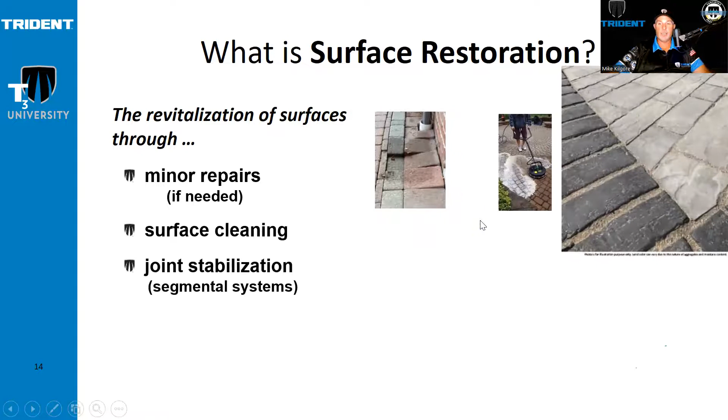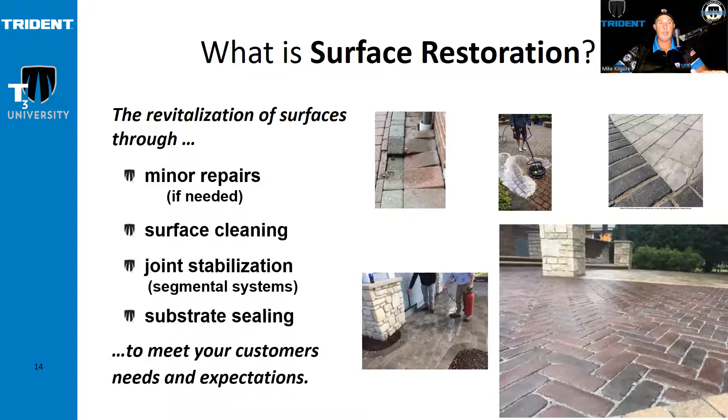The revitalization of surfaces through minor repairs, surface cleaning, joint stabilization, segmental systems, and substrate sealing - to meet your customers' needs and expectations. That's important, to make sure you meet your customers' needs and expectations. So don't leave money on the table here.

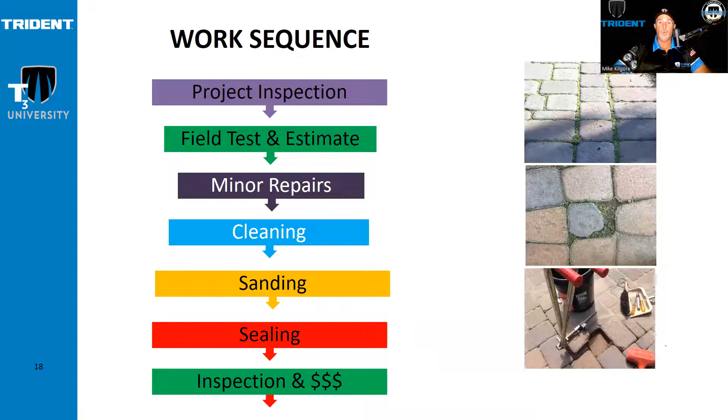So what we're going to focus on is the cleaning, sanding, and sealing. That's what we're focusing on today.

The project inspection, field test and estimate, minor repairs, inspection and money, sales, how to generate leads—that's what we cover inside of our advanced training. That's how we're getting you to become more of a better business and closing more deals.

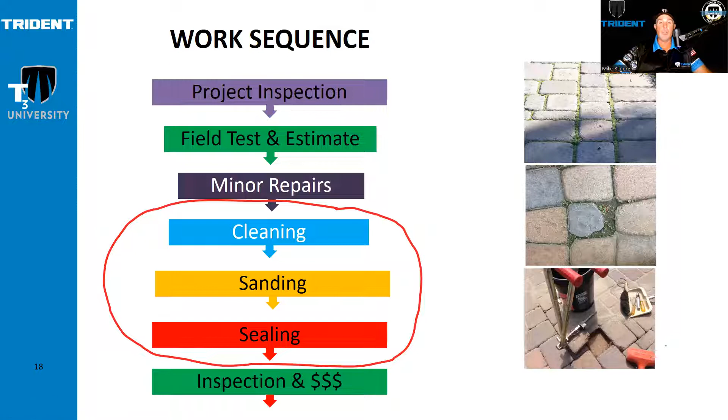So what do I need to know before I give a bid? You need to know the scope of work, the customer's expectations and values, surface porosity, coats and coverage rate, desired outcome—that's going to be really important. We're going to talk about the sealer triangle, sealer selection guide. Take photos before, during, and after.

Not just to CYA, not just because of that. We want you to take those photos because that's what you're going to also use for your marketing. Application technique, product availability, and of course, scheduling.

Hey, so Mike, cleaning, quick question. Yep, go ahead. They have a question if people are charging more for around pool areas and around lanais, or is anybody in Florida getting more money for that because of what it is?

I would say that on average, most people are charging one rate, but I do know that there are a few customers that say that if it's a driveway and it's wide open and there's no cages or anything else like that, they're charging one price. And I do know of two companies now that I think of at the top of my head that are charging a little bit more for pool decks.

Because you have to hand paint the coating or there's techniques for doing that. Also making sure that you're not getting sealer onto the screens. There's a whole lot more moving parts when you're dealing with a pool deck that's there than it is when you're just doing an open driveway.

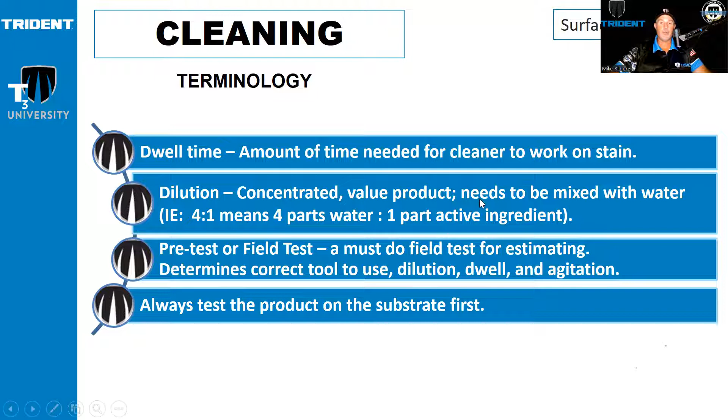Setting the customer's expectations and what they think. This is the listening time.

Typically, when I walk into a customer's home, which I don't do very often, my strategy was very simple. I'd walk in, say hello, glad we're here, show me where the pavers are. We'd walk in the back and say, wow, you've got a lot of pavers. Why am I here? What can we help with? And just leave it wide open to them.

Majority of the time, they're going to say, well, look how faded the pavers are, I've got weeds everywhere, I've got this, I've got that, these pavers are moving. They are just waiting to vent. Let them vent first, then you start to build your sales tactic around that.

Educate your customer. Give realistic expectations. Be careful not to oversell—it's very easy to do. Like saying, 'Man, I can make these pavers look brand new, like you just bought them off the showroom floor today.'

I'm going to give you a piece of advice, a saying you can use. A lot of guys I know use this in their marketing material. This is very important: we will make your pavers the best your pavers can be. Now that sounds really cliche, sounds very simple, but if I slow it down and put a different emphasis on a different syllable, it sounds a little different.

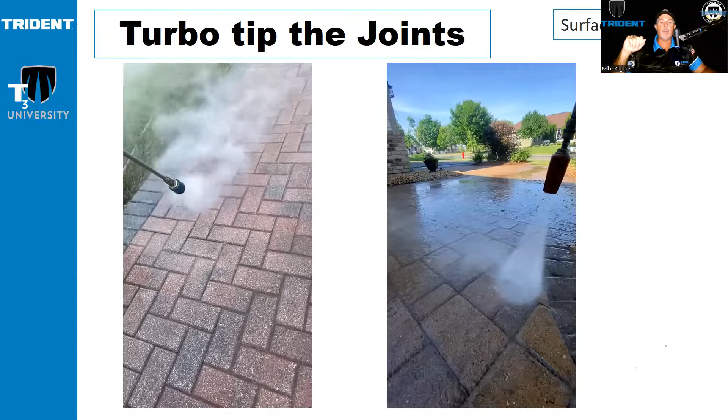This is by far my favorite turbo nozzle that you can get. The advantage is that it's got a tungsten carbide tip inside of it instead of a ceramic tip. Ceramic tips are notorious for breaking, especially if you don't start them directly straight down. With a tungsten carbide tip, since it's more of an excavation tip, it's not going to break. You can start it up, down, left, right—it's not going to make any difference.

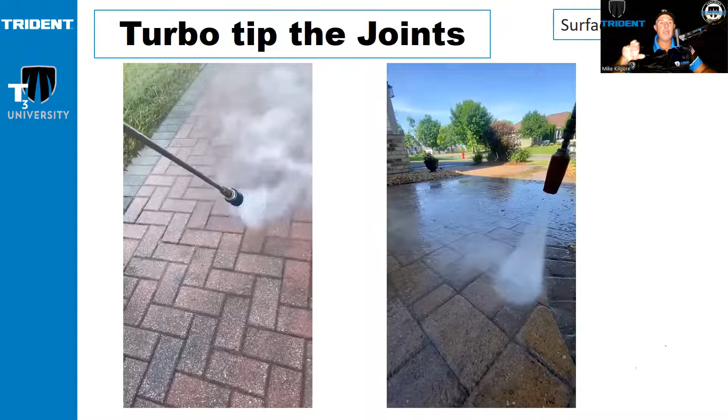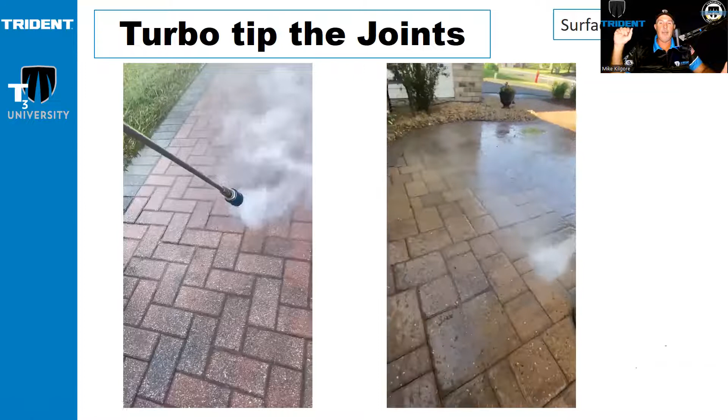Plus, they slow down the rotation a little bit, so it has a chance to dig deep in between those pavers. You can see over here, this is another one, I think a Suttner, digging down. But the first thing we want to do is dig out those joints. I prefer to dig out those joints first, simply because I want to get rid of any organics or weeds that may be inside of those joints.

If I use a surface cleaner over the top of it, there's a possibility I'll knock off all the leaves, and I'll have no idea where to really focus my effort to dig out those weeds. If you have pavers with a bunch of weeds that look like a big chef salad over the top, I suggest you get some Roundup and weed killer and flood that whole area two weeks prior to coming in to clean. Do it two weeks out, and again one week out. The objective is to show up and have everything completely dead—all the weeds completely dead. Then you can do the turbo tipping all you want. If you've got really tight joints and can't put a lot of sand inside them, it's going to be very difficult to block those weeds. So we've got to kill them, dig them out, and then put sand into the joints.

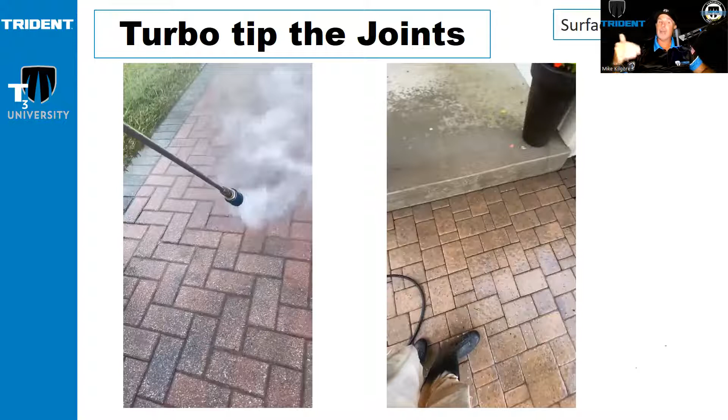Okay, these next two stages—the next stage is the longest one. It's got the most detail, and that's about sand, right?

Hey Mike, they asked if you turbo tip every time. I turbo tip every single time. The objective is to make sure you dig out the joints at least three-quarters of an inch deep. That's what you've got to do, at least three-quarters of an inch. So yes, I turbo tip every single time. Now, we do have some guys out there running 31 gallons a minute—Mike Arnone is one, and he's able to surface clean and turbo tip at the same time. But that's not all of us. That's why I always turbo tip, and I turbo tip first, to make sure I dig out those joints and get them as deep as possible, because I want to replace it with the correct joint sand.

All right, joint sanding—it's just sand, or is it? Let's talk about sand. What is the importance of joint sand? Loads are transferred from one unit to another through joint sand.

If you do not have joint sand in those pavers and you drive over the top of it, all that pressure from the truck sits on just the pavers the tires are sitting on. If you have joint sand in it, the tire can lay over to the right, to the left, forward and back, creating a big dome about this size, and that's where the load is being transferred to. So when we talk about load dispersion, that means the weight is now being dispersed across all the different pavers instead of just a few of them.

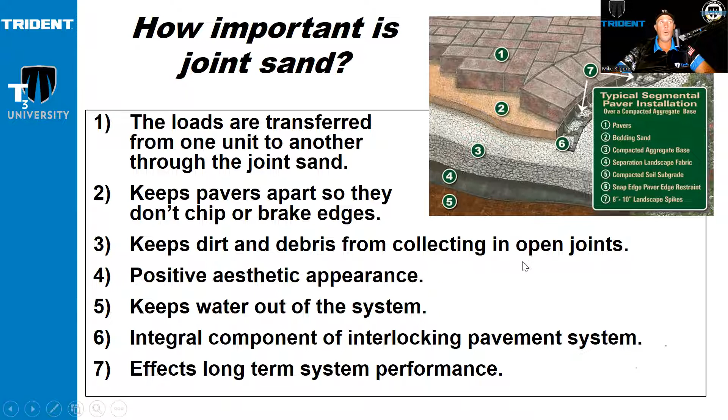This is what's called the soldier row on the outside to help protect the pavers on the inside. That's why they call it a soldier row. Well, that was a hard one to get out there. So, success begins with your choices.

Sand should be hard and angular shape, should be washed and have as few fines as possible, have no large aggregate, and contain no organic material. That's why you start seeing these guys talking so proficiently about play sand. Play sand is not kiln dried. It's got a lot of organic material inside of it. Majority of them, if you open them up in the bag, they've already got mold and mildew inside the bag.

The colors of the aggregate complement the surface. Made in America - don't know why that's extremely important, but all of our sand is made in America. Actually, it's made in Chicago, Illinois, outside in St. Charles of the Chicago, Illinois area. But this is important: it must meet the ASTM C144 standard for joint sand.

What is ASTM C144, you asked? Yes, I know, that's why you're asking us. The way in which it's created is that it has to meet certain sieve analysis. I'm going to show you this sieve analysis right here. I'm not going to go into great detail with it, but what you're finding is that it's got an aggregate that is not rounded.

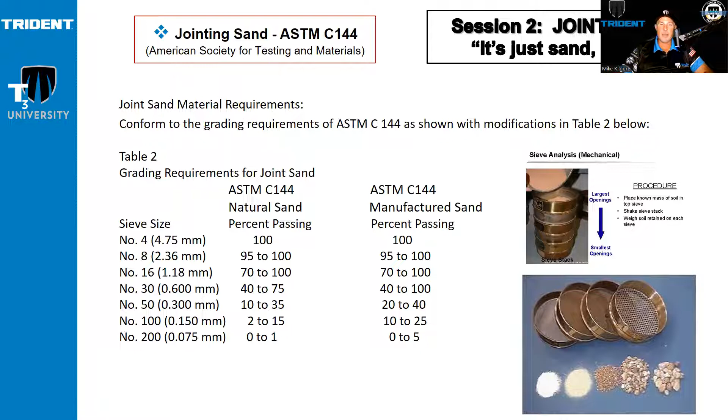We talk about joint stabilization out there - there's no one that's more versed around joint stabilization than Trident and SEK. This is our specialty, joint stabilization. This is what we excel at.

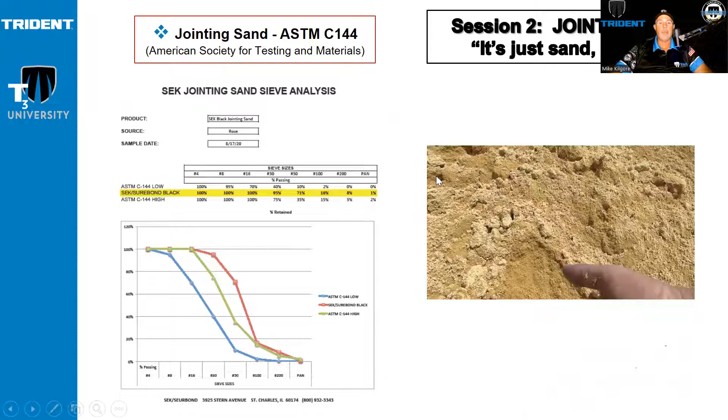So as you can see, the jointing sand sieve analysis - there's what's called an ASTM C144 low, SEK Surebond Trident black, ASTM C144 grade high, and we fall right in between the middle of the low and the high. So there's two different grades of ASTM, and we're right in the middle. That's why we have such fantastic sand that everyone keeps talking about.

So where is the sand supposed to be, right? Let me go into here and do a little annotation. So here's my annotation right here. Majority of people that are starting off in sanding and sealing, they're going to take that sand and go straight across here - they're going to run right across the top of those pavers.

The problem with that, filling in the joints from here, is that these pavers right here tend to go up and down with weight transfer that happens on it. Well, when they do, it ends up cracking those areas that are here. So then you get all these broken joints, and it takes out all the sand inside here, and it just looks horrible. So let me go back to this - where is the sand supposed to be?

The sand's supposed to be 1/8 of an inch below this area right here, which is called the chamfer line. See this line right here? I'll give you a little arrow. That is your chamfer line.

That's right there, and you'll see it on the pavers. Now, on tumbled pavers, typically you don't have a beveled edge. This is where the bevel would be, as you can see on this side. This is a tumbled paver that goes all the way over, and we want it to be 1/8 of an inch below the surface.

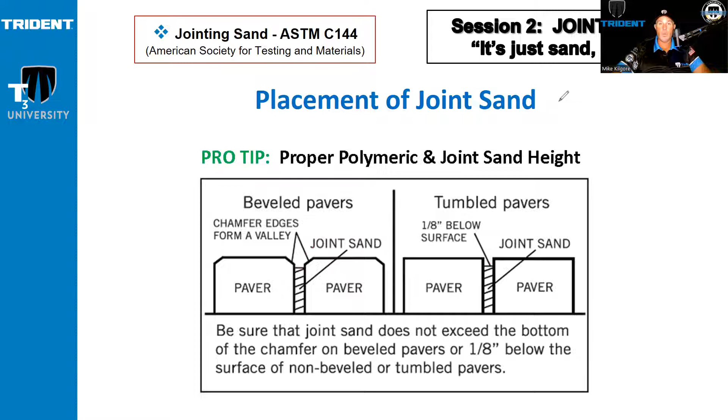So let me clear this out. Everybody good there? All right. Come on, there we go.

So we have 2 types of sand - actually 3 types of sand now. We're not going to really talk about the resin sand because that's getting ready to start to come out next month. You're going to start seeing more of those on the board where we talk about the resin sand. I'll tell you a little bit more about it just so that you know.

But joint sand and stabilizing sealer is the best choice when you clean, sand, and seal, right? And the polymeric sand is a good choice when you clean and sand, right? Because the sealer itself is going to harden the sand inside of the joints.

It meets ASTM C144 for joint sand - angular, wash, dried. Color of aggregate: we have tan, gray, fieldstone, platinum, black, and pearl, which I'll show you the pictures of here in a second, made in 50-pound bags. And also we have stabilizing sealers covered in the JSS sealer section, which we're going to talk about - that's the joint stabilizing sealer.

Polymeric sand is a good choice. The interesting thing about polymeric sand is a lot of guys in Florida say you should never use polymeric sand in Florida. You're right - you should never use polymeric sand incorrectly in Florida. I'll say it again: you should not use it incorrectly in Florida.

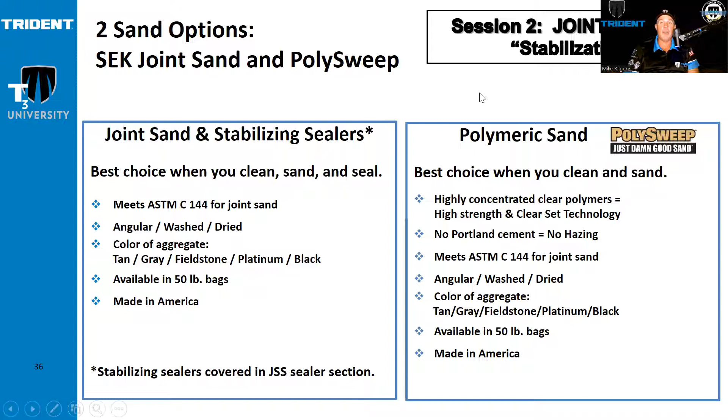So these are the 6 colors: tan, gray, fieldstone, platinum, black, and pearl. You can also contact us and we can send you a sand sampler with all 6 of these sands inside of it, free of charge. Actually, you end up getting one when you register for an account on Trident Protects. That's part of the onboarding process, is that we send you a sand sampler and some flyers.

Hey Mike, real quick. Yep.

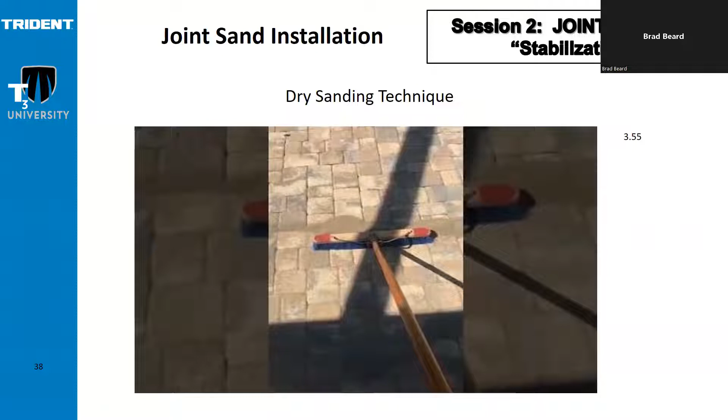We're looking to see if we have any bags of tricks for, do you have a trick to get the sand 1/8 of an inch below the chamfer? Yeah, you take a straw, put the sand in your mouth and you blow it in there, and it's great. Or you take your hand or something. A lot of that's going to come down with just experience, right?

I use wet sanding technique. We're going to talk about the 2 different techniques that are here: the dry sanding technique, a lot of that has to do with your broom, and of course the wet sanding technique, being able to push that sand inside of the joints.

You're going to find people that are going to come on here and say, I've tried wet sanding and it's horrible. I'm going to give you a piece of advice for wet sanding: don't start off just doing a pool deck with a bunch of different angles. Try it on a driveway first. Also, make sure that you're keeping the water out in front of you.

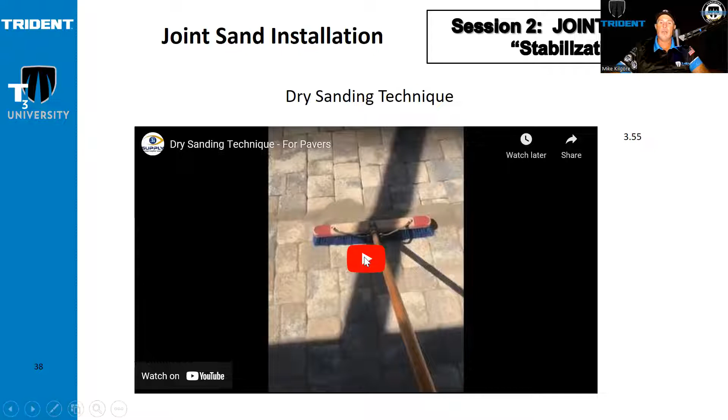But what I want to show you here is the dry sanding technique. And I'm going to put this on mute. Look how handsome that guy is from a couple of years ago. He's incredibly good looking. Not really.

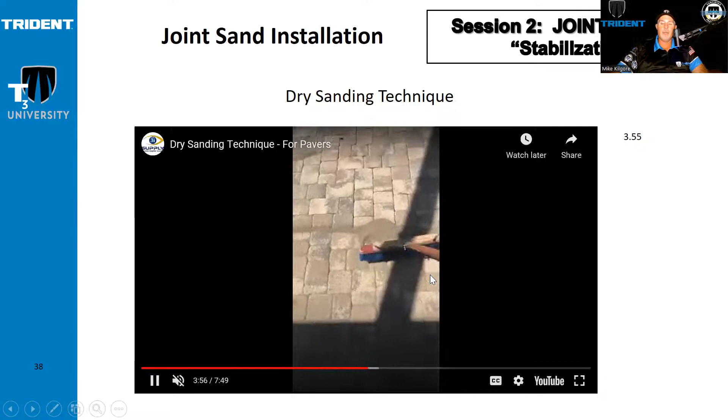3 minutes and 55 seconds. I know I cheated, it's right up here. But this kind of gives you an idea of what the wet sanding, dry sanding, what you don't want to do.

What you don't want to do is bulldozing, where you're pushing it across. A lot of people, everything about your body is going to make you want to do this, right, and then go into it and clean it up. The problem is it creates bridges across the top.

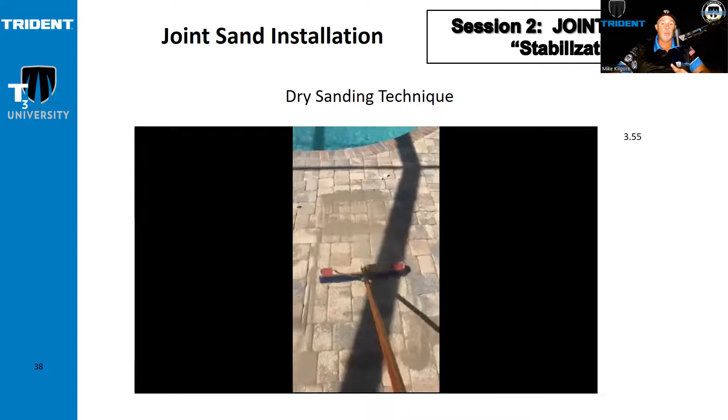What you want to do is get behind the sand, which I'm going to show you here in just a second, and you want to flick it out in front of you so that it's starting to fill up that sand from the bottom. See how it's flicking out in front of me? So it's filling from the bottom to the top and cleaning up.

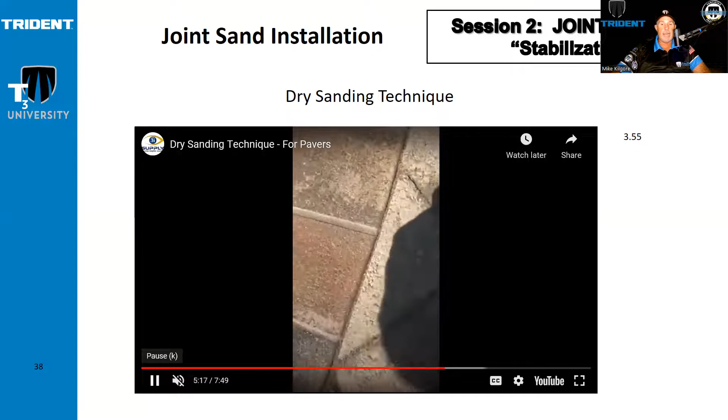Now what I want to show you is once we get to here, you're going to see that sand line, see right there, cleaned it up right inside those joints. It's about 1/8 of an inch down below. Now I'm still going to come back and blow it off, but typically, if you're not blowing straight down and blowing out in front of you, that sand's going to sit about 1/8 of an inch, not exactly 1/8 of an inch below.

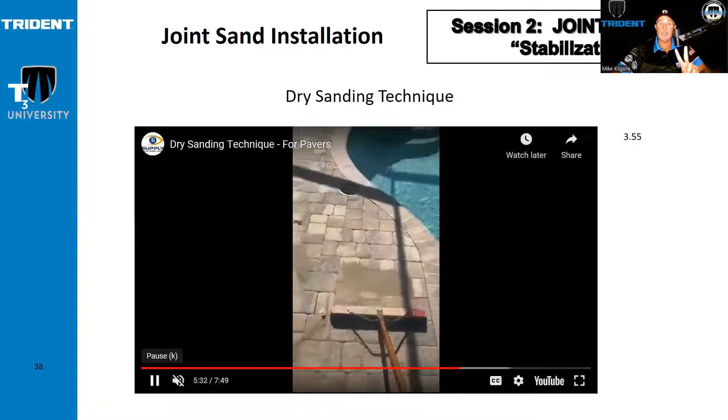Now, when I get done and come back the next day, because we teach a 2-day cleaning, sanding, and sealing process, then you come back the next day. If there's some sand missing there, I'm going to grab a handful of it, throw it in there, and then blow it off. Okay.

We're going to show you a little bit of wet sanding right here, turn my volume all the way down. This is Rob Harris moving in the platinum sand inside of these joints. So as you can see, we're using the process called hydrocompaction, where we're moving the sand in a direction, diagonally across, and it's falling down inside of those joints. By falling down into those joints, first of all your sand's going to go a whole lot further, but the sand is going to be so much cleaner. And this, we're using a 2-step process where one person is moving the excess along as the other person is cleaning it up from behind. Here's another video right here.

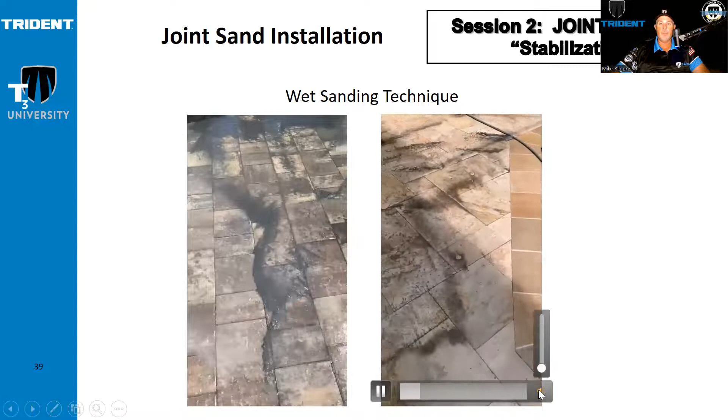Turn the volume off. So you can see right across the travertine, just cleaning that up and moving that sand right across. As you can see, he's keeping it out in front of him and moving the sand across here.

Most people will tell you that the sand we use is the best sand that they've ever used. No doubt about it, it has been studied. There are rumors of other people bringing out other sand in the marketplace. Look, we've dealt with people bringing out sand for years and years. This is by far the best sand for cleaning, sanding, sealing, and joint stabilization.

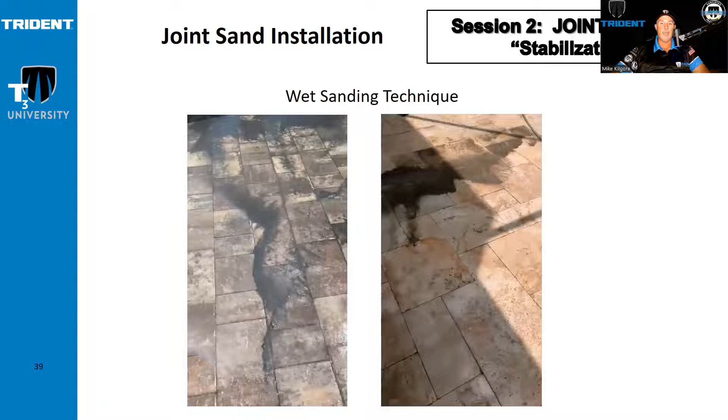Now, Poly Sweep for joints up to 3/4 inch wide. Poly Sweep Extreme for joints up to 4 inches wide. So we have an extreme joint sand too that can be used for big joints.

A lot of people are going to say, wow, those joints look like they're way too high. Remember, these are tumbled pavers right here, so they don't have that beveled edge, and they are very, very separated. So it looks like the sand is really high, but there's no bevel to it. There's just big gaps inside of there.

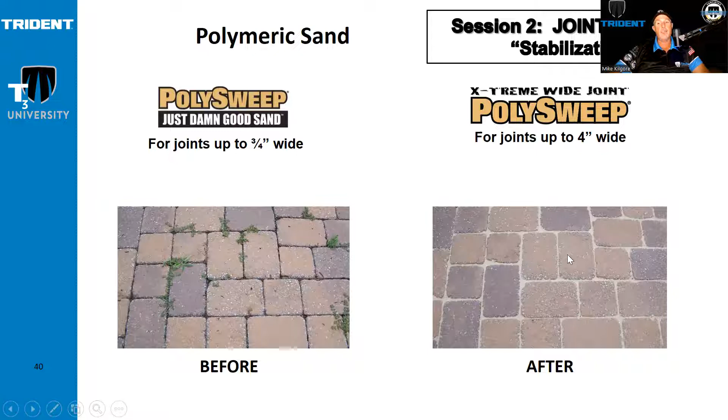We've got a hardscape project that's ready to be completed. All the pavers are in place. We've installed snap edge paver restraints. Our surface is clean and dry. And that means it's time for PolySweep.

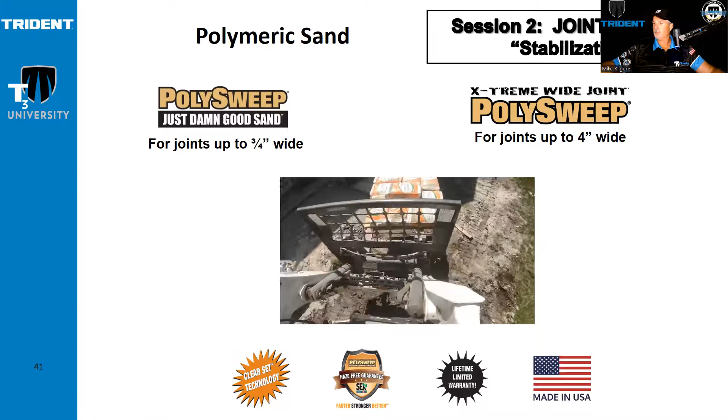Your reputation is on the line with every job you build, so don't compromise on your polymeric sand. PolySweep is just damn good sand.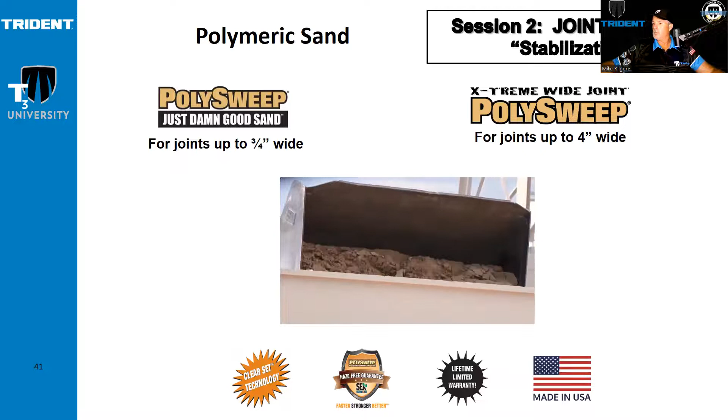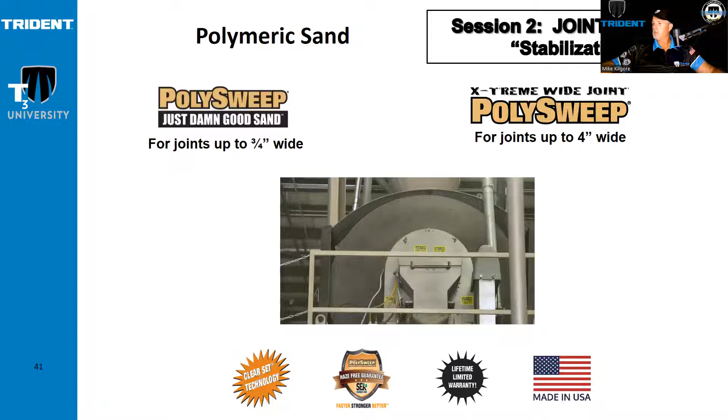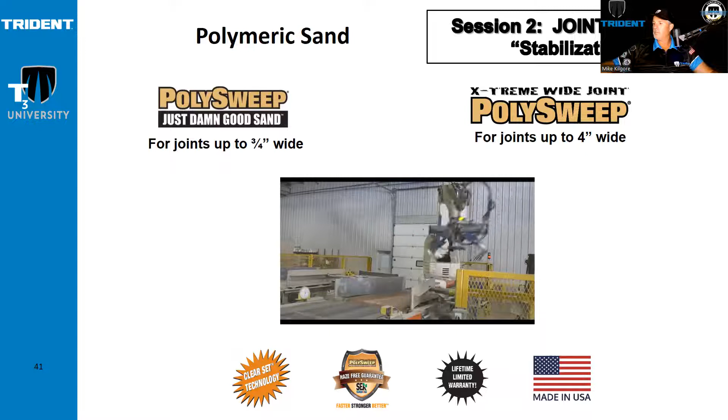Let's talk about what makes PolySweep unique. Regular and extreme wide joint PolySweep are both superior strength, long-lasting polymeric sands made with a blend of ASTM C144 sand and the highest quality, clearest synthetic polymers. PolySweep is manufactured at our state-of-the-art facility, ensuring consistent quality and reliability. Our dedicated logistics team specializes in getting PolySweep into the marketplace as quickly and as inexpensively as possible.

Once activated with water and allowed to dry, PolySweep will form a hardened joint that helps prevent sand loss, inhibit weed growth, and deter insects. PolySweep has superior strength and long-term durability, plus it's RCS safe and guaranteed to be haze-free.

Before we get started, this would be a good time to review the ICPI recommendation for best practices for hardscape installation. You will need to use a 3/4 inch modified stone base and sand for your setting bed. You can also use PolySweep with open graded base systems.

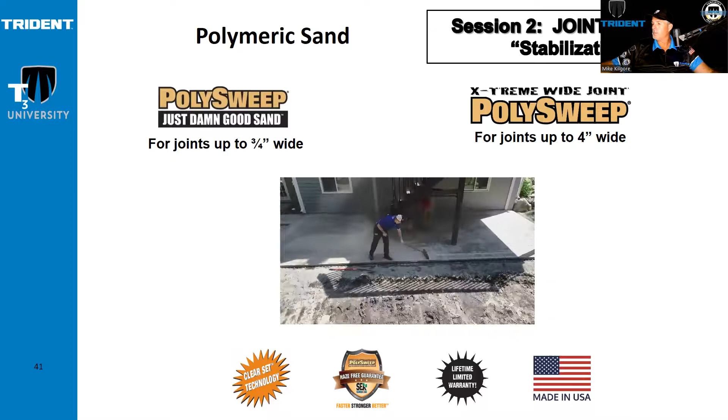Remember to install PolySweep when the average ambient air temperature is above 35 degrees for a minimum of 48 hours after installation. The pavement surface should be dry and there should be no rain forecasted for 12 hours after installation. Use PolySweep for pavers for joints up to 3/4 inch and extreme wide joint PolySweep for joints up to 4 inches.

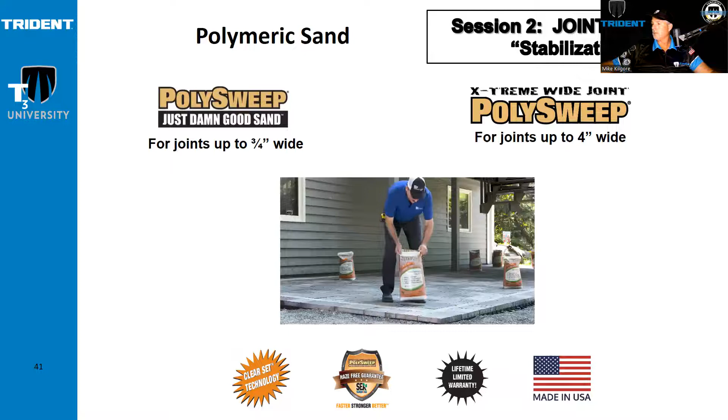When you're ready to apply PolySweep, here's a tip: save your back. Stage the 50-pound bags evenly around your surface. Then cut open and distribute each bag low to the surface, forming an S pattern as you pour within a small area.

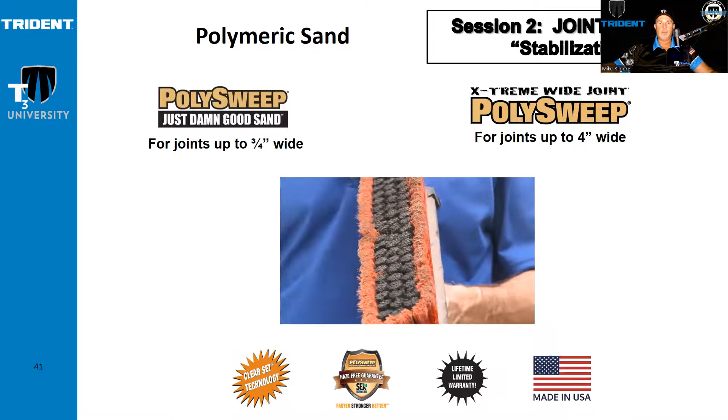When you're ready to sweep, the right broom is key. Look for something with medium stiff bristles. These work best for removing the excess PolySweep from the surface. And a small hand broom works great for tight areas.

If at any time in your project you end up with a pile of PolySweep, don't just muscle that down to the end of your surface. That's called bulldozing. When you bulldoze, you'll drop out the light particles first, then the medium weights, and by the time you get down to the end of your surface, you'll have nothing but sand at that point.

Rather, pick up a shovel, take a scoop of that PolySweep, and bring it down to the other area, and just repeat that till you've eliminated that pile of sand. That will help ensure a nice uniform application of PolySweep.

Make sure you don't overfill the joints. The sand should be no less than 1/8 inch below the surface.

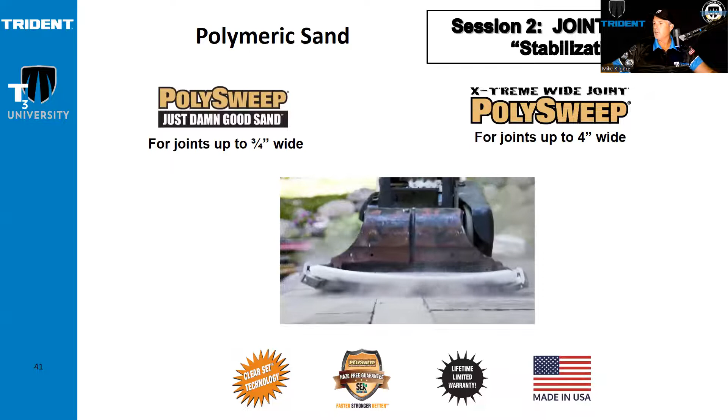After you've swept PolySweep evenly throughout your project, make a pass with a vibratory roller or compactor with a neoprene pad to help consolidation. For tight areas, a hand tamper or rubber hammer will do the trick. You may need to repeat these steps to make sure PolySweep is evenly distributed and the joints are filled to the correct height.

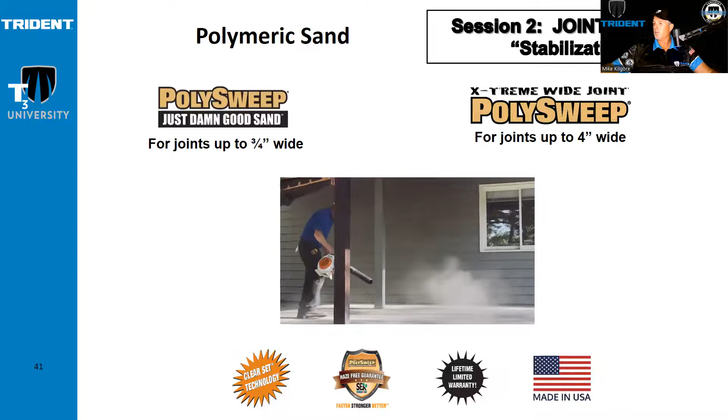This is the point in the process where the details matter. Once your joints are correctly filled, it's time to remove the excess from the surface using a leaf blower. Be sure to use a low idle and direct the blower at an angle to the surface to avoid removing polysweep from the joints. It's important that the excess polysweep is cleared before you mist your surface. Pay extra attention to remove polysweep from the corners, bottom of the stairs, at the garage door, and other places where it can accumulate.

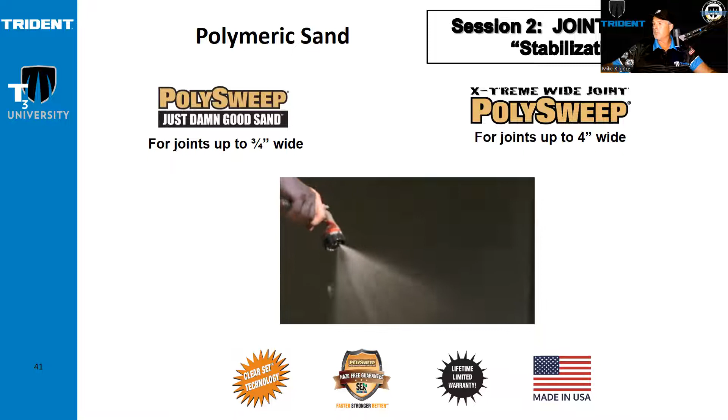Now it's time to water. The watering process is what activates polysweep. Using a hose, gently mist the pavement, allowing water to absorb into the joint. After 5 minutes, repeat the misting process up to 3 or 4 times, gradually increasing the volume of water each time. Be sure to wait about 5 minutes between each misting. For optimal joint performance, the entire sand joint must be fully saturated. Any residual water caught in the texture of the pavement surface should be blown off with a leaf blower.

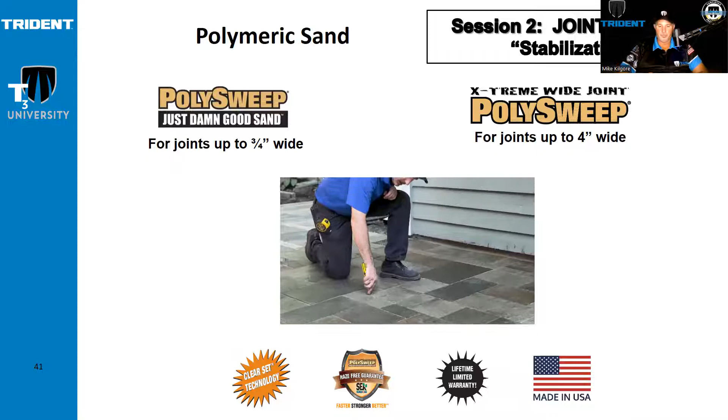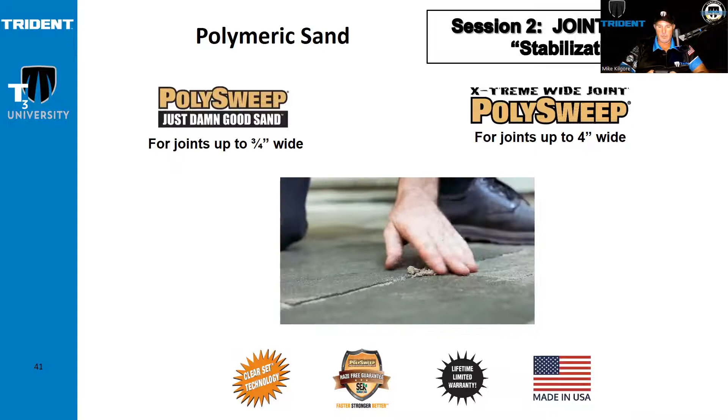To check to see if you've got the proper amount of moisture in polysweep, you'll need a screwdriver, a putty knife, or even a pocket knife to work well. We're going to pick a joint, and we're just going to dig down in the joint to see how far water has penetrated. In this particular case, I'm down about that far. That's not enough. We want to go all the way to the bottom of our polysweep joint. So what we'll do is just push this back into place and then apply more moisture.

Polysweep takes 24 hours to cure, depending on site conditions, temperature, and humidity. Once it's dried and cured, it's time to enjoy your beautiful hardscape. You can also use polysweep on natural stone, porcelain tile, and concrete overlays.

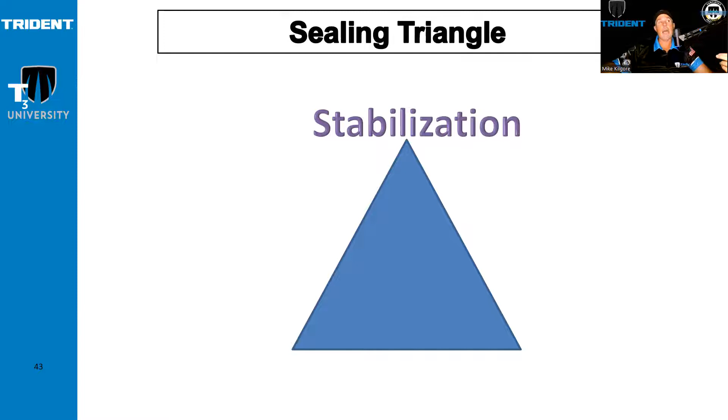But if I go into a room and I've got a room of, say, 50 people that are there, and I ask them, what is the wet look? Right? Because that's what a lot of people are looking for, the wet look. I'm going to get multiple different answers. Some of the answers are going to come across as, I like it, the change of the color, the enhancement of the color. Then you're going to have the sheen and the shine. Here's the problem. If you ask a customer what they're looking for, and they tell you, I want the wet look, but you do not separate the 2 attributes, enhancement and sheen, you could very easily potentially provide them something that they're not looking for.

If their idea of a wet look is enhancement, not sheen, and you give them a high gloss finish, they're going to be upset because it's got a high sheen, high gloss finish. If they are looking for something very shiny, but your idea of a wet look is enhancement and you give them a matte finish, they're not going to be happy.

That's why we need to ask the customer two questions. Do you like it when I put water on these pavers and look at just the colors? Do you like it when it's dry, or do you like it when it's wet? Look at the colors. Oh, I like it when it's dry - that's a natural base sealer. I like it when it's wet - that's going to be an enhancing sealer.

Now let me ask you a question. Do you like low sheen, medium sheen, or high sheen? When we talk about high sheen, we're talking about looks like a mirror that's out there, really, really high sheen. Pay attention, class, really important: the higher the sheen, the higher the problems.

Oh, look at this gloss. Look at this shine. Look at this sheen. Look at this thing right here. The higher the sheen, the higher the problems. You can trap moisture, you can trap efflorescence, you can make it slippery - there's more problems. I can tell you that a majority of the guys out there are not selling on sheen and shine anymore. They're selling on enhancement. That's what they're trying to do.

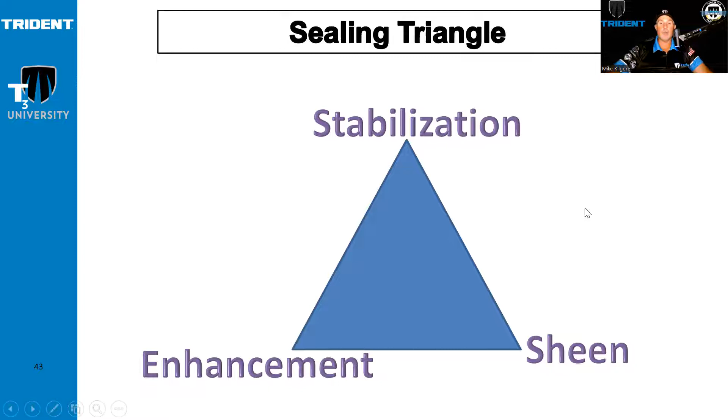So there are two types of sealers: film forming sealers and penetrating sealers. Film forming sealers are about appearance and performance. That's why we have those - it's going to give you the deep colors, the enhancement, the sheen, the shine, develop a level of sheen, stain resistance, joint sand, or chip stabilization. We don't talk a lot about chip stabilization - that's going to be for when we're doing any type of drainage systems.

Penetrating sealers, it's all about the performance - guard against water and salt infiltration, stain blocking. Hybrid sealers can also add appearance and sheen.

Now, stain blocking and guarding against water and salt infiltration is going to be involved primarily with protecting concrete. It also helps protect against the freeze-thaw cycle - as water goes down into the concrete and it freezes, it expands, and when it expands it actually chips the concrete, causing a spalling effect. If we can keep that water from penetrating, we can also keep it from cracking. Now, we can't stop roots, we can't stop movement and shifting of bases underneath it, but what we can do is help protect against that freeze-thaw cycle.

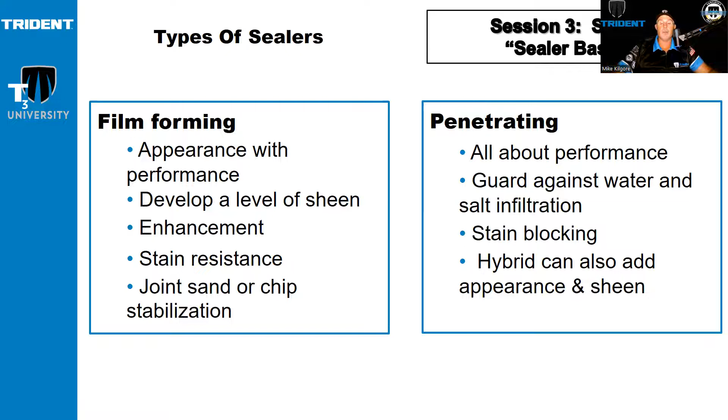So up north, if you guys are looking to do any type of sealing and get caught up before the end of the season, right now is the time you should be talking about concrete sealing to your customers to protect them through the winter. Now, we have two types of film-forming or penetrating sealers, and we're going to talk about those in just a second.

On every bucket of sealer, you're going to have a lot number - this is not a date number. There is an actual rhyme to reason, unfortunately I can't tell you what it is, but it is a rhyme to reason. That doesn't mean the 5th day of the 3rd month of 1960 is when this was made - it's an actual lot number. We suggest that whenever you do any type of job, you get that lot number and write it down, just in case.

One, when you make a product, you make it as superior and as high quality as possible by using quality ingredients. We've all been through shortages lately, and people are making changes to formulas. It doesn't have the same sheen, it doesn't give the same result. I see people all the time, even with other sealers, saying it just seems like I'm not getting a consistent sheen. It's because you're not putting it on consistent pavers. If you've got pavers that are super thirsty and ones that are super dense, it's not the sealer's fault, it's the substrate you're putting it onto.

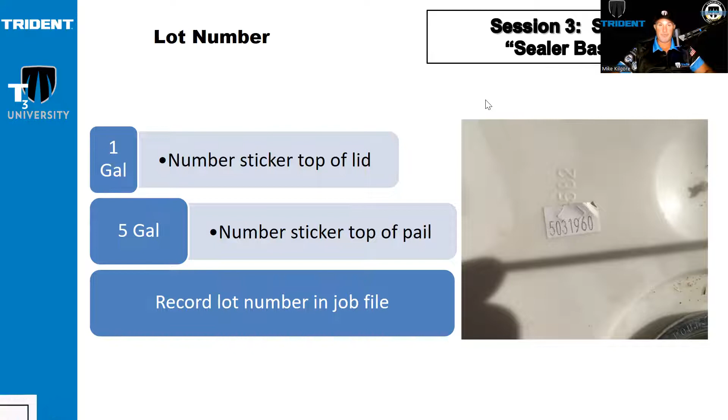All right, we also have a sealer selection guide. It's a great way, it's on our website, that helps you walk through choosing the type of sealer that makes perfect sense for your customer's expectations and the type of performance you're looking for. You can follow along with enhancement, joint stabilizing sealers. Are you looking for stain blocking, water repelling, salt protection? This is a really cool sheet that we'll send to you, also included in your welcome packet when you sign up for an account on the Trident Protects Contractors Only site.

Solids, are they equal? There's going to be a lot of conversations out there talking about solids. This is an important slide. Does more solids mean it's better? You're hearing people say, oh my gosh, I've got 56% solids, I've got 54% solids, I've got 39% solids, more solids means it has to be better. Is that true? No, it can't.

Can you add more solids and make it better? Absolutely, you could add more solids, but you have to add the right solids and balance it with all the other chemistry involved. That's why some sealers out there have increased their solid count as far as urethanes, but haven't balanced it out with the part A, and they had failures like crazy. So be very, very careful when people say more solids means better. It's the right solids that make things better.

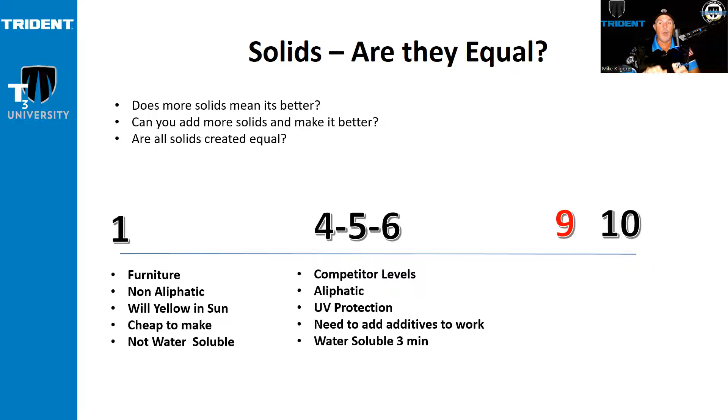Our sealers, the Cat 5 2-part urethane, are aliphatic. It has advanced UV protection, protecting against the sun for longer, which also helps keep the sealer from breaking down, giving it longer durability and longevity. It's a pure form of urethane—it's water soluble in 1 minute because we don't have any of the additives that Part B needs to go through to get to A.

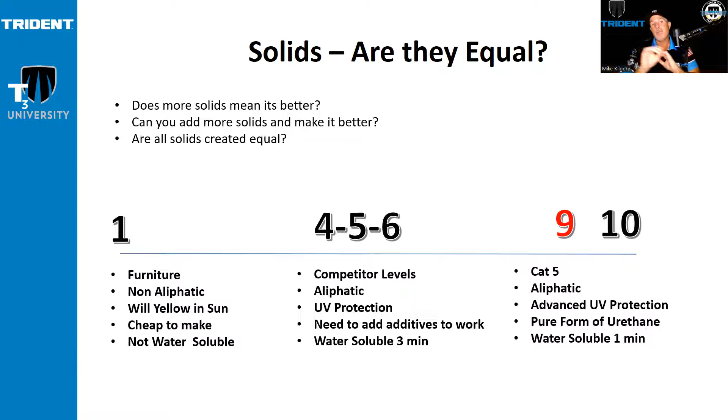Now remember I told you about the sand? This is what I was talking about. A lot of people talk about the 20-30 grit silica sand. One reason we don't use 20-30 grit silica sand, also known as pool filter sand, is because the majority of it is rounded. There are actually 6 different types of sand, ranging from very rounded to semi-rounded, semi-angular, medium angular, super angular, and crazy angular—nothing but angles. There's a bunch of different ones.

I actually have a picture of it somewhere, but I don't have it in here.

The problem with the round is that the sealer can go straight through. Let me go back to my annotation here. The only contact points that you get are right here. It's as if I took a bunch of basketballs and put them into a basket—when I do, the only contact points I've got are where they come together.

So that's your only contact point. When you get something that's fine, like a play sand, it doesn't allow the sealer to come all the way through, so it creates a crust across the top. You can typically tell when that happens because you can dig it and pick that off, and underneath it's all pure powder. This also happens when they try to use polymeric sand and use sealer to harden the sand.

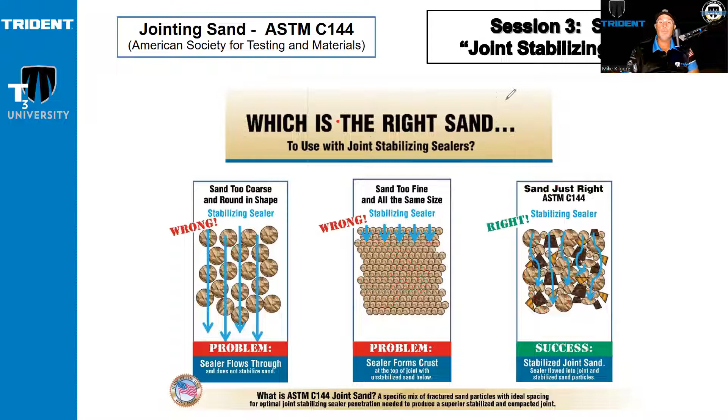So, talking about some sealers and we're almost done. Joint stabilizing sealer, our number one seller out there, Hurricane Cat 5, 2-part urethane concentrated gloss finish, deep color enhancement. This kit right here—5 gallons of part A, 2 gallons of part B, makes 20 gallons of sealer. That does anywhere from 2,000 to 5,000 square feet of pavers, depending if you're doing joint stabilization or not.

So when we see people calling and saying, oh my gosh, Hurricane Cat 5 is so expensive—it's the equivalent of 2 kits of Kabalock, it is the equivalent of 2 kits of Uraseal. You've got 5 gallons of a highly concentrated part A that makes 20 gallons of sealer.

Now, do I get people all the time coming and saying, well, I don't get 1,000 square feet from my sealer, I get 1,600 square feet? Great—if you're stretching it out that far and getting 1,600 square feet, you're going to get 5,000 square feet with ours. But don't come in and stretch that sealer and compare it to the actual manufacturer specs.

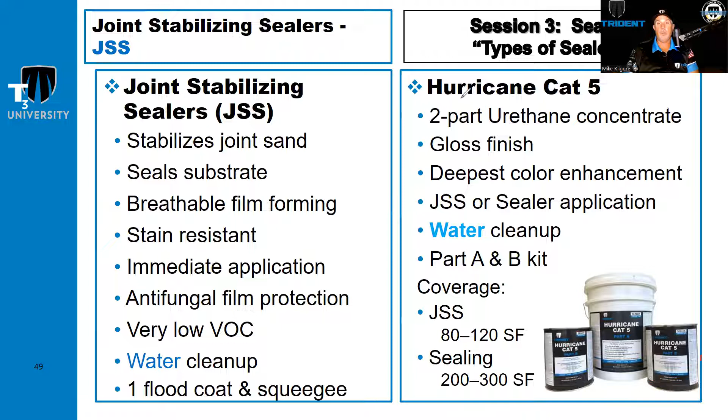Go away. Clear, clear. And then let's go to next picture. Here we go.

On the back of part B, you have what's called the D1 solution and the D2 solution, dilution 1 and dilution 2. Dilution 1 is taking this kit and making 15 gallons, so that means you're going to get a higher sheen, higher shine, deeper enhancement.

If you're making the D2, which is primarily what a majority of people are doing, they're going to make 20 gallons of sealer. So if you look on this chart, for 2,000 square feet it's 5 gallons of part A, 2 gallons of part B, add 13 gallons of water, makes 20 gallons.

So you can look at this and say, all right, I want to do 500 square feet. I need 5 quarts, which is 1.25 gallons of part A. I need a half a gallon of part B, which is 2 quarts. And I need the rest of it, 3.25 gallons of water, and it makes 5 gallons.

It's actually very simple: 1.25 gallons of part A, a half a gallon of part B, mix it together for 1 minute, fill it up to the top with water, mix it again for another minute, and you've got 5 gallons of sealer. But let's say you just need 2.5 gallons — you can go to 2.5 gallons and work backwards.

The difference in these charts is this one is with joint stabilization — that means you're doing a flood coat and a top coat. This other one is sealing only, what you'd put over resin sand, polymeric sand, or something you don't have to do joint stabilization with.

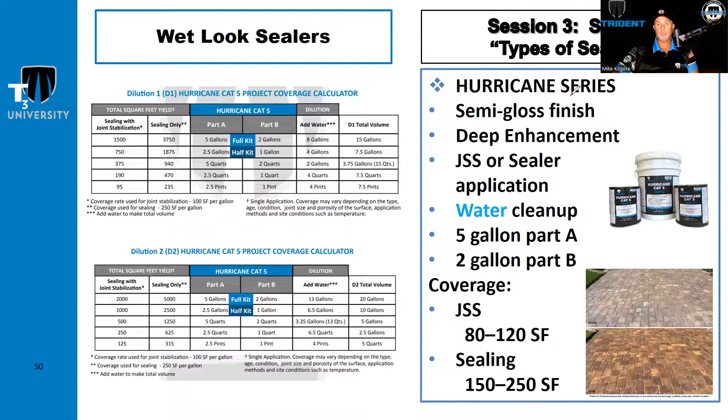Kind of going really in depth this time tonight — you're getting a little extra out of me here today. I know we've lost maybe 2 people, but I'm really going in a lot more depth than I normally do.

Cyclone is our natural base sealer. It's the ready to use version, for someone wanting something natural. This is a very, very important piece — pay attention, this is really important.

When we talk about joint stabilizing sealers that you put in and it hardens the sand, you have all these competitors out there saying 'oh, we've got this sealer, that sealer.' If you look right here, it's hard to see, but in this area you're going to see a 1300 — this is what's called SB 1300 on the Tridents, on the SEK side, SB 1300.

Cyclone is the first joint stabilizing sealer ever made. This is the Adam and Eve of all sealers, or the Adam or Eve, depending on what you want it to be. This is the Adam and Eve of all sealers.

So when it comes to joint stabilization, 30 years ago, SEK and Dennis, the chemist who's still with us today — love the guy, funny as can be — I tried to get him to make me some Breaking Bad stuff, but he wouldn't let me do it.

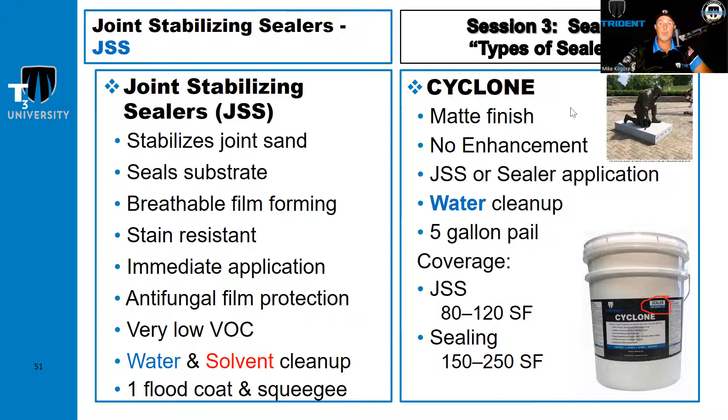Natural base, great on travertine, great on pavers. It's not going to give it an enhancement or create a sheen or shine. These are breathable film forming sealers, and that's very important for the breathability of sealers.

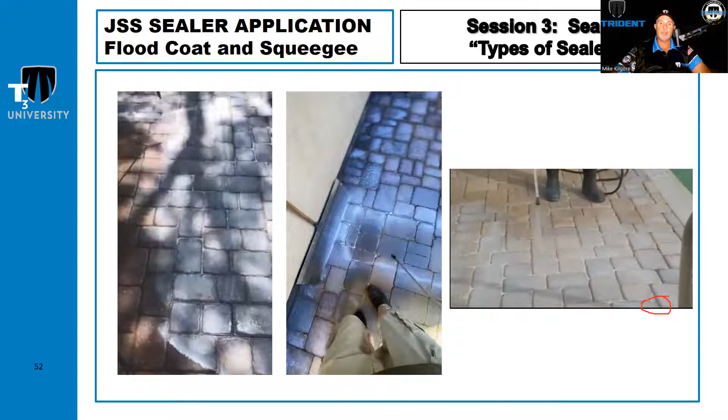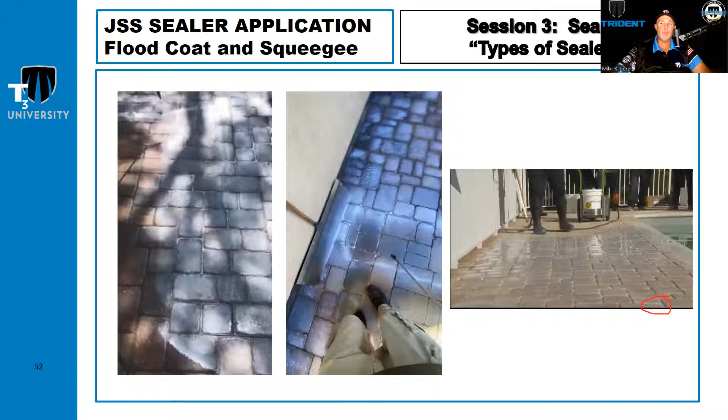This is a flood coat and squeegee application. You can see that we're flooding down the sealer, going into the joint, then taking a double foam squeegee and diagonally pulling the excess into the joints. Watch what happens - see how we're pulling the excess sealer down and into those joints so that we're getting optimal joint stabilization. You want to reduce your callbacks - do joint stabilization very, very well and you'll reduce your callbacks.

So penetrating sealers - horizontal, vertical surfaces, stain blockers, water repellent, salt guards. This is going to be really good for you guys up north that are looking to protect concrete from the spalling that we had talked about.

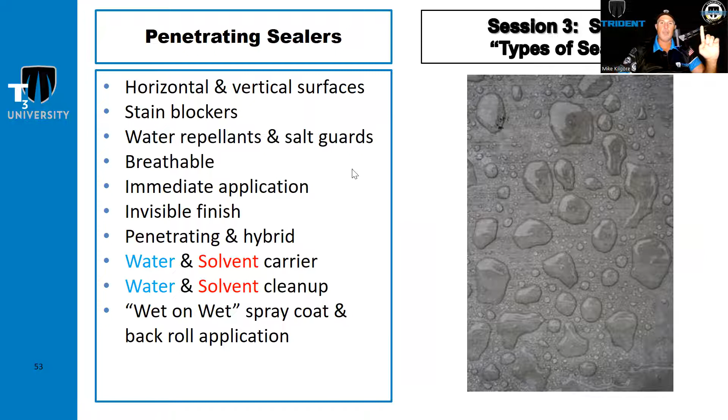We've got two sealers that we're going to talk about here. One of them is Break Wall. It's a water-based sealer. It protects against salt guard, invisible, breathable, immediate application, penetrating, water-based carrier. The thing about Break Wall is you can put it down when it's still damp. The key is you want to try to keep water off of it for 24 hours, 24 to 48 hours. If you can keep it off for 48 hours, it's even better.

People can walk on it when it's dry. One of the advantages is that you can show up to a job, clean the driveway, walk up to Miss Smith and say, would you like for us to seal it? Give them their pitch, have a 12-volt system, spray it down. You can spray about 1,000 square feet in about 15 minutes, 10 minutes. It's a great moneymaker. Break Wall is a 2 to 3 year sealer.

The advantages with Seawall - it's a solvent base, so it needs to be dry before you put it down. It doesn't have to be completely bone dry, but it needs to be dry, typically 24 hours after you clean it. Seawall is a solvent base, but this is a 5 to 10 year sealer. Out on my driveway, I've got a big spot that I did with Seawall. I'm on year 7, almost to year 7 of my house, and I still have that spot, that big area that I did out there in Seawall. I'm not saying, but I am saying that it is by far my favorite concrete paver or concrete sealer.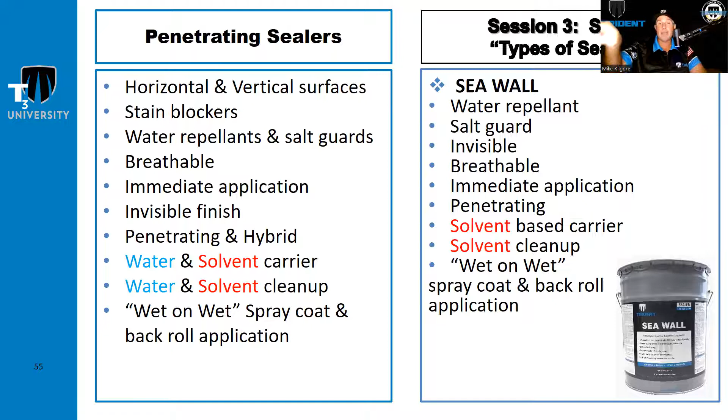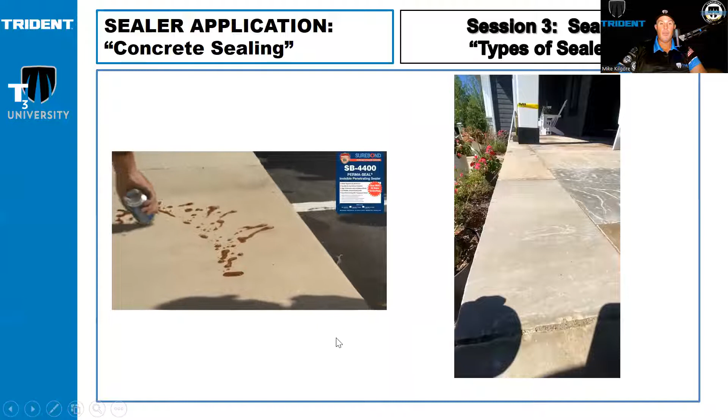So here is Sea Wall, which is also on the Trident side, SB 4400.

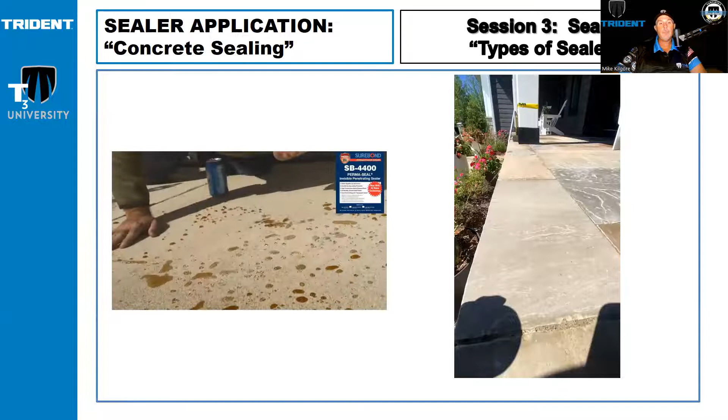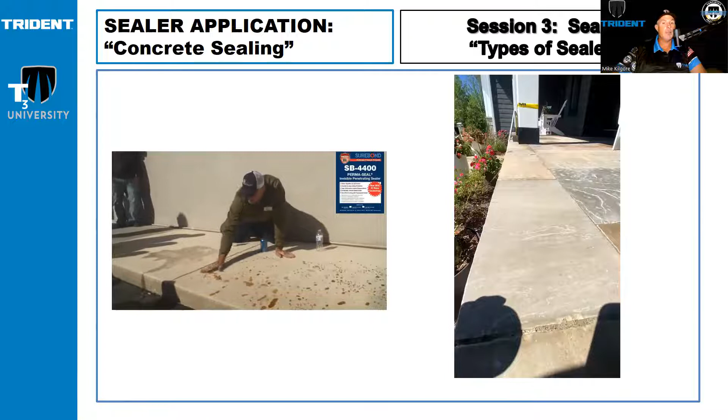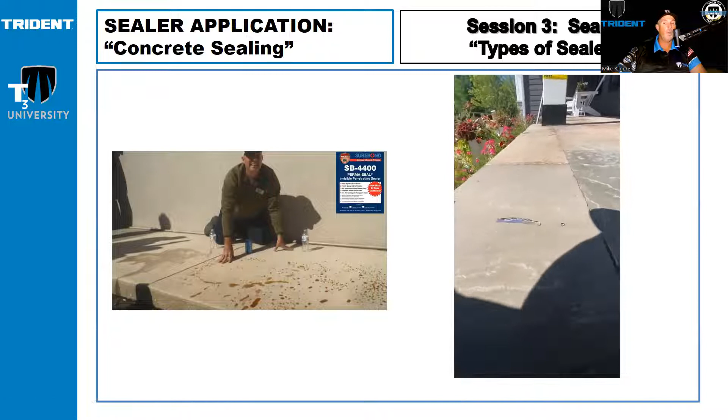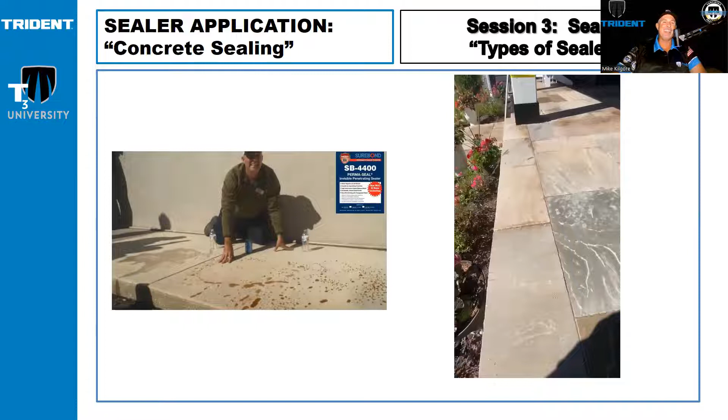Like the sound effects, isn't that great? And then here's another little small video. So watch with the sound effects too. Watch, I'll put it on mute. Ready? Watch. Didn't it make you feel like you were right there? I know, I'm getting tired. It is what it is, right?